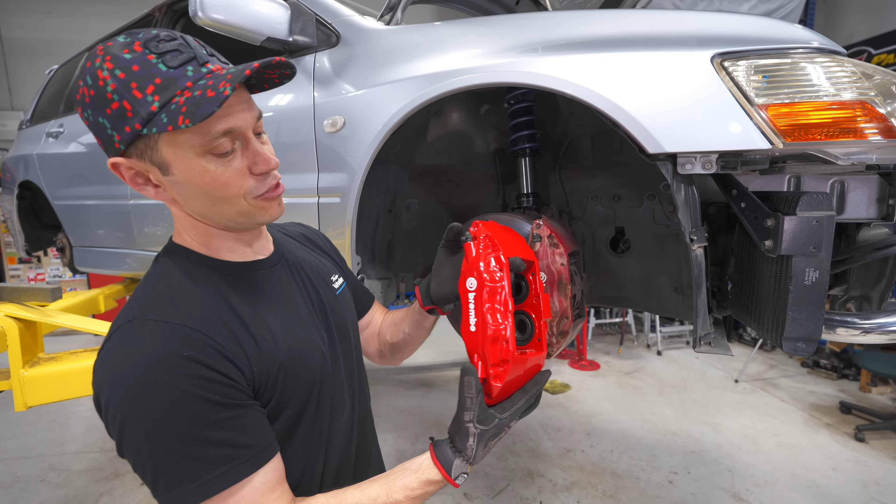This side, however, I did run into a weird thing where the best mod for any EVO is super expensive, and we're just wrecking like some Ralliart collectible. Exactly.

Today is a big day in the life of this EVO 9, everyone. We have big plans, including replacing the suspension, completely refreshing the brakes, and of course doing the all-important wheel and tire reveal. So you're gonna wanna stay tuned to the very end of this episode to see just how amazing this car is gonna look. I don't think you're gonna be disappointed. I'm so excited to see how it all looks in the end.

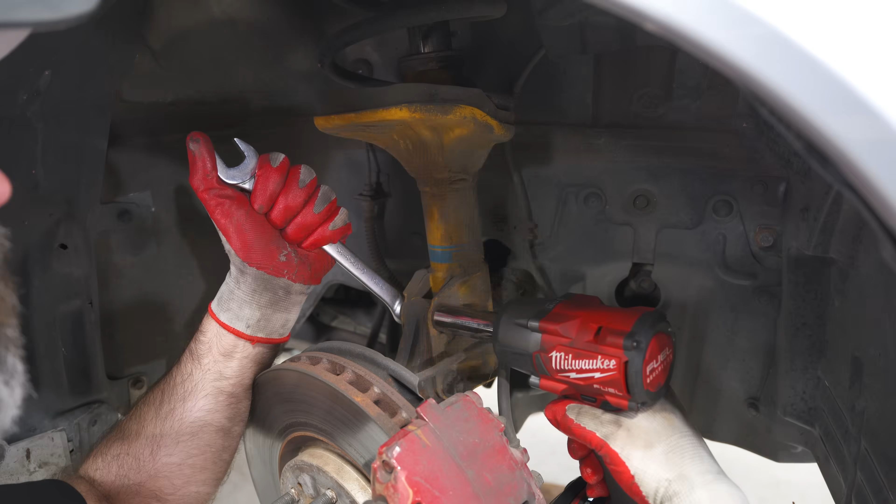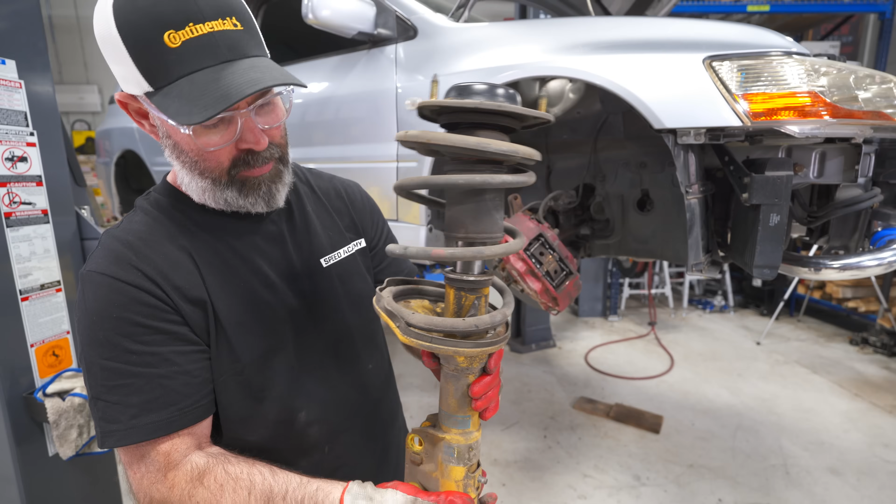And here comes the giant, what I assume is the OE shock and spring combo. The big old Bilstein inverted damper by the look of it. Wow, it's pretty impressive. EVO still always impresses, man. This thing weighs a metric ton though, and obviously does not have ride height adjustability.

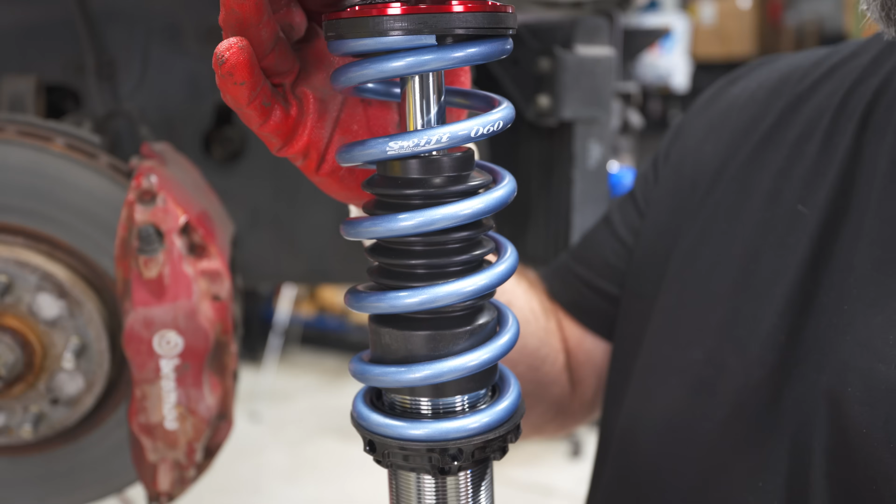And here we go, these are our Annex Flat Ride Pro setup, and they're like half the weight or maybe even lighter than that really bulky OE setup. Interestingly, this is one of the first cars that Annex ever made a coilover kit for.

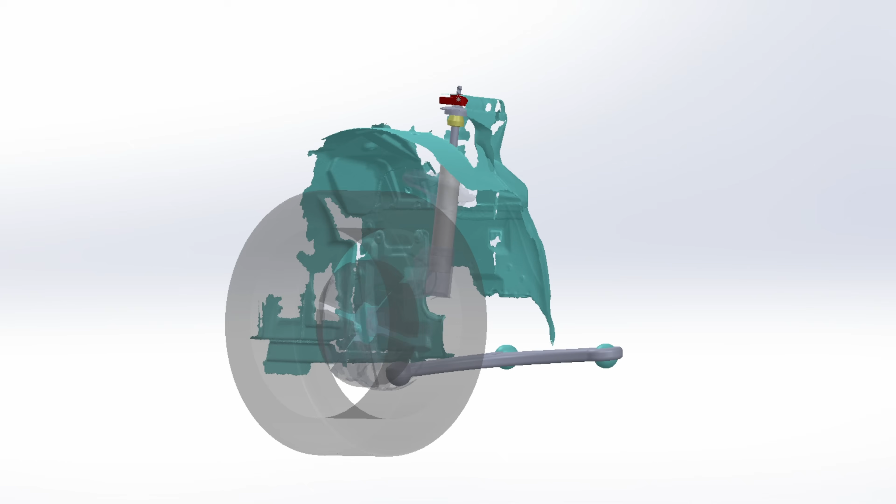However, because they'd never done a wagon before, and Grant was at our shop scanning Connie Salika, he took the opportunity while he was here to scan this car as well. So he did super detailed 3D scanning of all the wheel wells, which allowed him to calculate the motion ratios, which then allow him to choose spring rates and damper curves to go along with those spring rates that suit this chassis perfectly.

And he did find that the wagon is significantly heavier in the back than the sedans, so it does actually use a different spring rate and damper setup in the rear of this wagon versus most other coilover companies, where if you go get a kit for an EVO 8 or 9, you're gonna end up with a sedan setup on your wagon. This is actually a wagon setup, which I think is super rad.

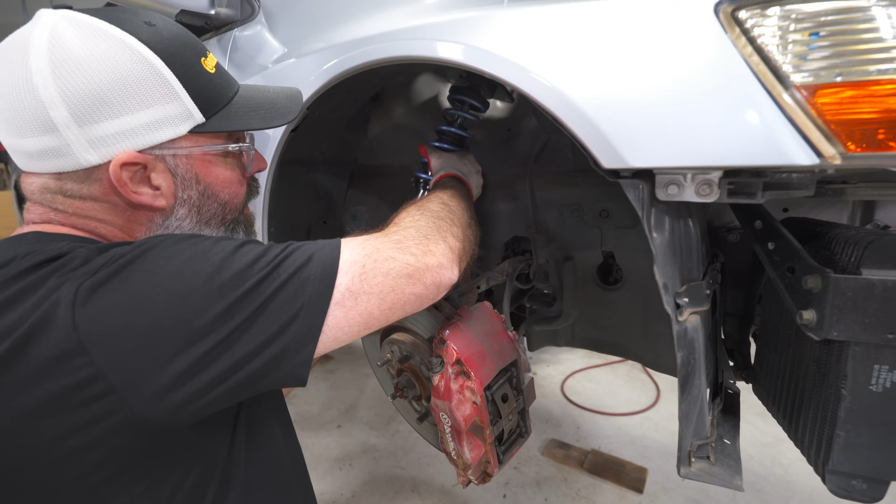One other thing Grant mentioned to me when we were chatting about this kit's development is that he designed it for a flat ride. As the name would imply, it's designed to really limit the sensation of body motion or body roll. So through the corners there's not gonna be excessive body roll, but it's still gonna deliver really good ride quality. It'd be really interesting to try this out once we've got the car fully dialed in and see how that feels.

The previous owner, or the owner before them, did not really care about the interior of this car, because look at this, they cut this massive hole here to either be able to adjust the suspension that was on this car previously, or because they got lazy and didn't want to take this whole panel off to get to the nuts that hold this shock in here. And you can see there were holes cut here for a strut tower bar.

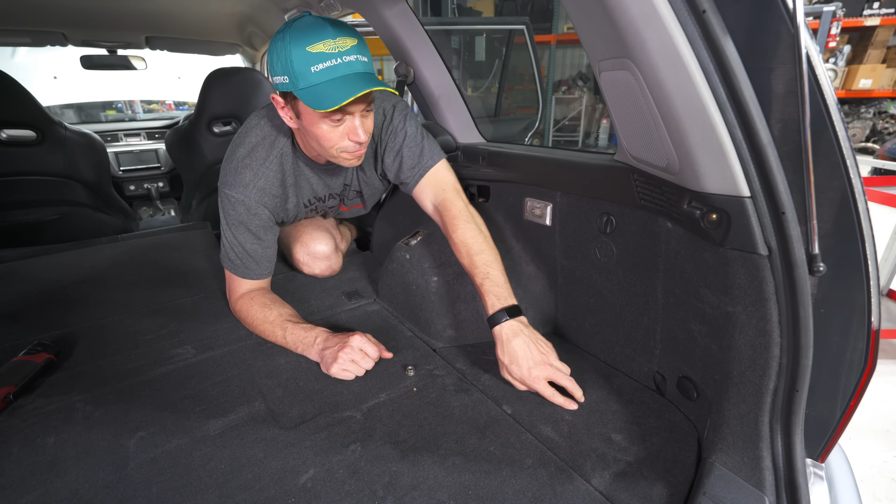It just feels very un-Japanese. By the way, I just noticed this outlet here for 12 volts that you could plug into, maybe to pump up your tires or something, but this certainly is ahead of its time. These days people are putting this in trucks in the back and wagons, and Mitsubishi had it figured out all along back in 2005.

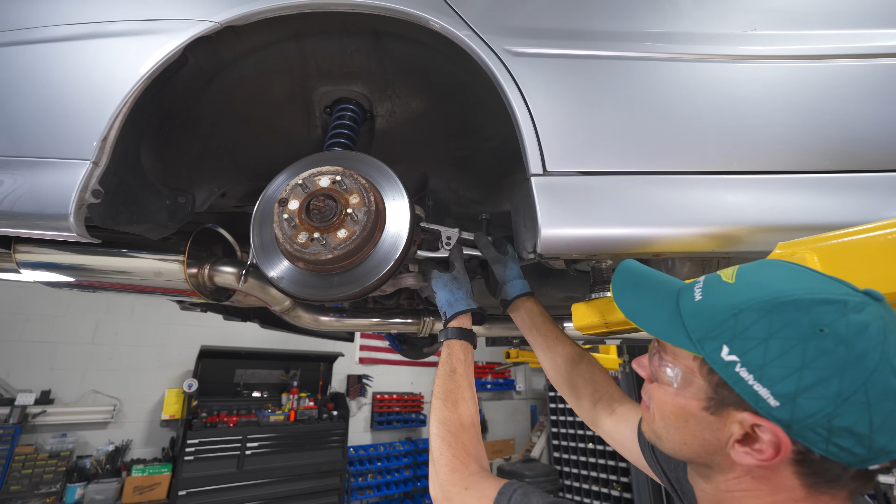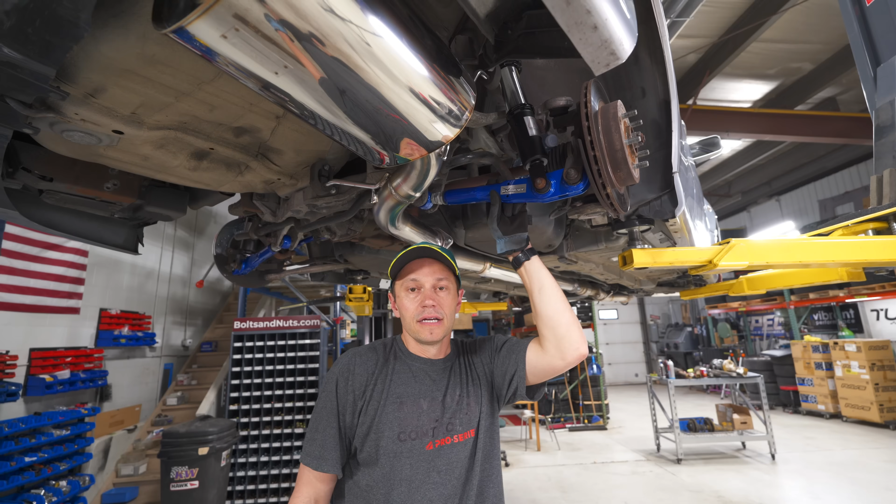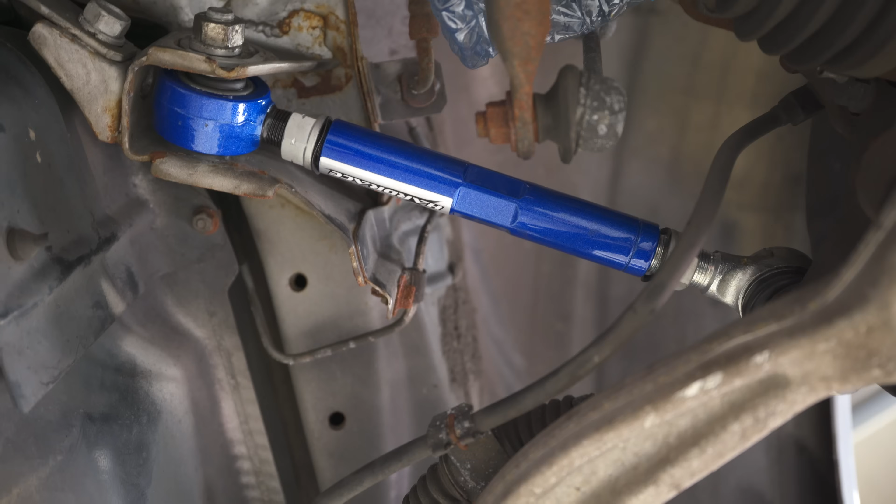And that, in a nutshell, is the extent of the suspension mods. As you can see, we put the Hardrace adjustable lower control arms on here. These are gonna allow us to adjust camber in and out, and we've got the toe arms as well, which will allow us to adjust toe. Toe was adjustable on this car, however, I like having those arms.

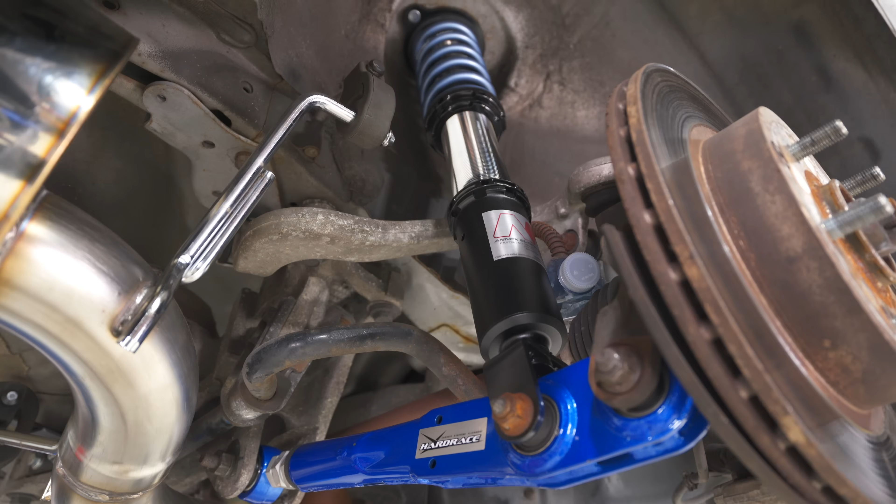You can see we are missing a caliper here and the brakes are quite worn. We're gonna be doing something about that in one moment, but before we do, I need to clean this area up here, and you will understand why when we put our wheels on. Let's just say they don't have center caps and we want this to look proper. So I got a wire brush on the drill here, and I'm gonna do my best to clean this up as good as possible, just to get the surface rust off.

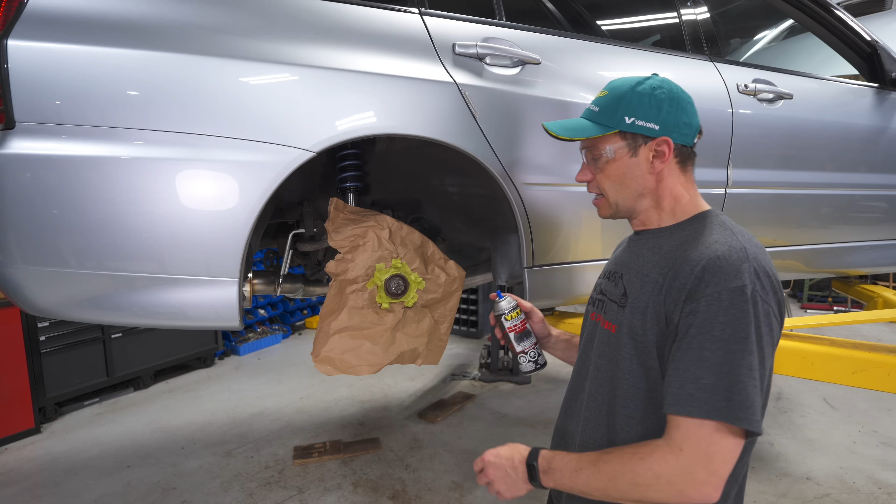So you can see this is nicely cleaned and prepped, and we are going to be using some VHT roll bar and chassis paint, because that's kind of what I have, and I think it's gonna be the most durable. Just gonna give this a quick blast here, and we're gonna do the same for the front as well.

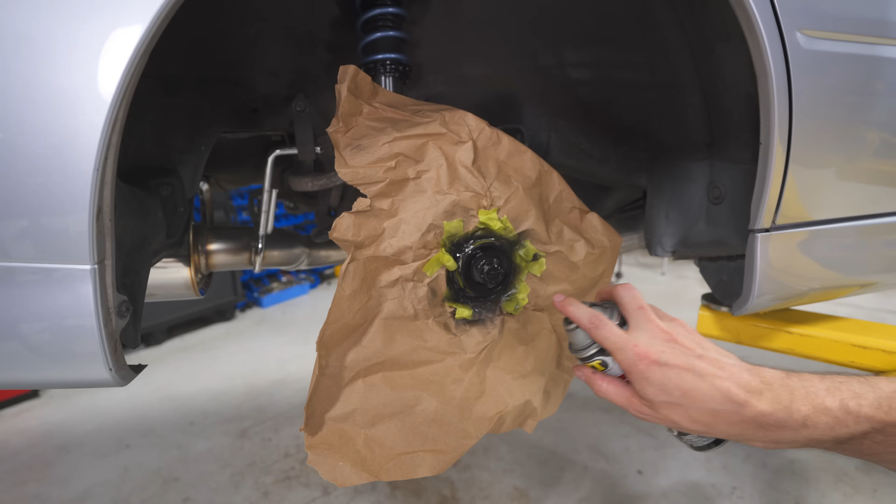A little bit of black paint here is going to go a long way when you see the wheels. What you saw is I just ended up rolling the rear fender here, because the wheel fitment is just a tiny bit tight. These EVOs can have nice concave wheels, but the rears do need a bit of a roll, and the driver's side went perfect. It's just so good.

This side, however, I did run into a weird thing where I don't know if there was a little bit of stuff that was fixed back here, because it wasn't rolling very well in the middle. Now you can see there's a pinch weld that was here, and it almost collapsed a little bit of the sheet metal here. It's not bad, but it's just enough that you can see it, so I think we're gonna have to call a PDR guy in to just give this a little pull and bring it back a little bit. I think that's going to be the case.

We are moving on to doing a brake upgrade, and even though these Brembos are amazing, the Mitsubishi and Subaru 4-pot Brembos are perfect. They're very adequate for 90% of the people using these cars, even for track use. However, as you can see, they do fade out, and they have clear coat that just fails. You can see it's falling off, and then you just have a caliper that looks kind of disgusting.

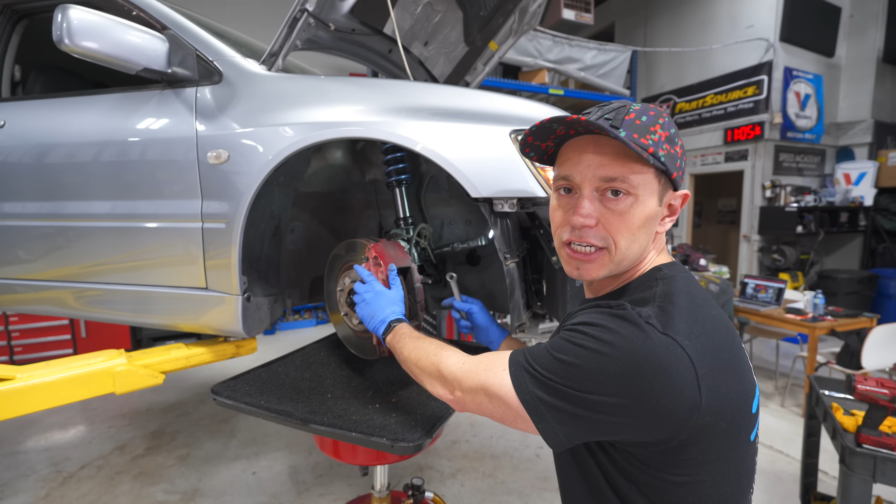Here's a bit of a pro tip. I'm ready to pull the caliper off. The brake line is hooked up into here, and usually as soon as you break this loose, you're gonna have this line start dripping and leaking and drain all the fluid out of the brake master. However, you're gonna see here, I'm gonna get a small surge of fluid that comes out right now, both from the caliper and the line, and then it's just gonna stop.

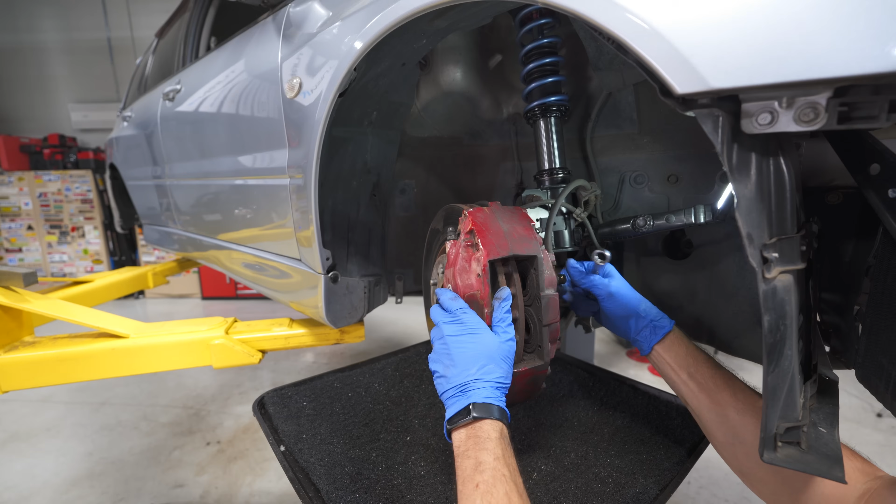That's because what we've done is we've depressed the brake pedal, and we're using a brake stopper. So the brake is all the way down, and in doing so, it kind of pushes the seal past the master, so there's only a certain amount of fluid that'll run out of it. You can see, look, this isn't dripping. This will stop dripping here, and that's it, you're not gonna get any leaking. So now you can take your time doing this caliper swap rather than rushing to get the other one on while the fluid constantly drips.

So it's actually a pretty good tip. You do need, you know, you can use a piece of wood or whatever to push your brake pedal down. We kind of have this nice tool for it.

We are also saying goodbye to the factory rotors. You can see these boys are well worn, got a nasty little lip on the side there and there. Replacing that stock rotor, we have a PowerStop Z23 Sport Upgrade brake kit, which consists of this zinc-coated rotor, got some cross-drilled slots in it for that performance look. The kit comes with the sport pads that are carbon fiber, everybody.

Now I'm gonna have carbon fiber in my brake pads. They are a carbon fiber ceramic, but they're obviously gonna provide us with better stopping power, and they're also good for low dust, which is nice. The kit also comes with brand new hardware, as you can see right there. So I'm gonna punch those back in, but now look at, oh, how refreshed and good does that look?

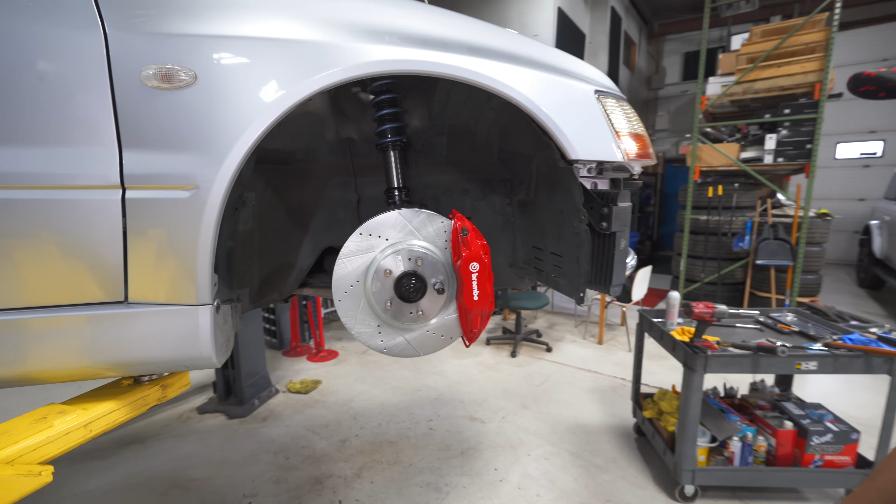It's a mighty fine brake upgrade, and I know some of you are gonna ask why I didn't paint around this area where the rust is. Well, when I originally masked it, the rotor was on and I couldn't get there. But don't worry, when the wheel is on, everybody, that rust does get covered up. So it's safe, it's just cosmetic right now.

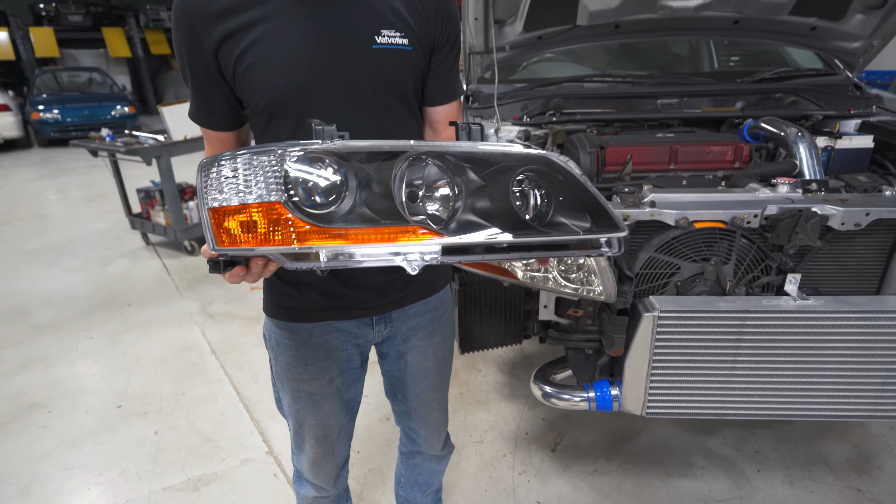Instead of splurging on a bunch of exterior mods like front lips, side skirts, that kind of stuff, I decided to put my money into what I think is the best mod for any Evo. The 9s already look so good. I don't think they need much other than, bam, everybody, a set of Evo 9 MR headlights. These are the JDM ones, so they're a matte finish in here, and I think they are going to finish the look of this car so nicely.

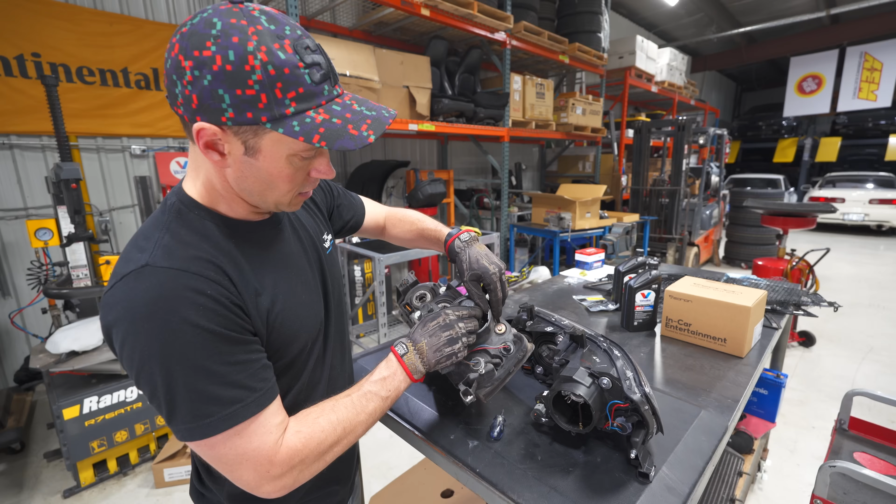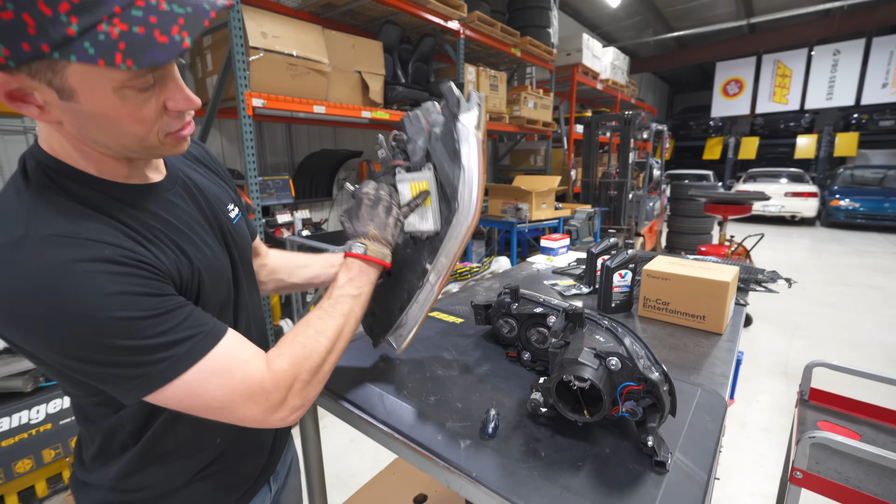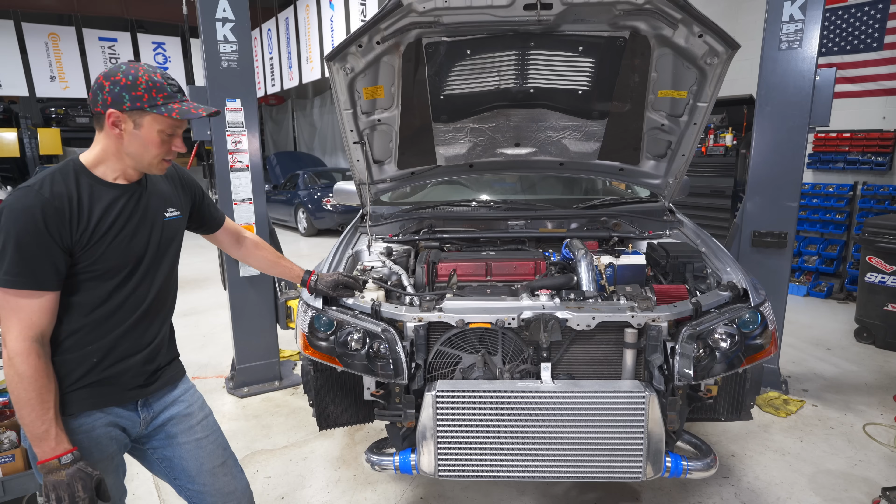For those of you making this upgrade, you will need to move over your HID ballast and the actual igniter, which is down here. So that may pose a problem for some of you that don't have HIDs. I think some of the Evo 8s came with regular halogen ones, but as you can see, this one is set up. So in this scenario, because this is a JDM car, this is literally a plug and play solution. These truly are the holy grail of Evo upgrades. Man, do they look good.

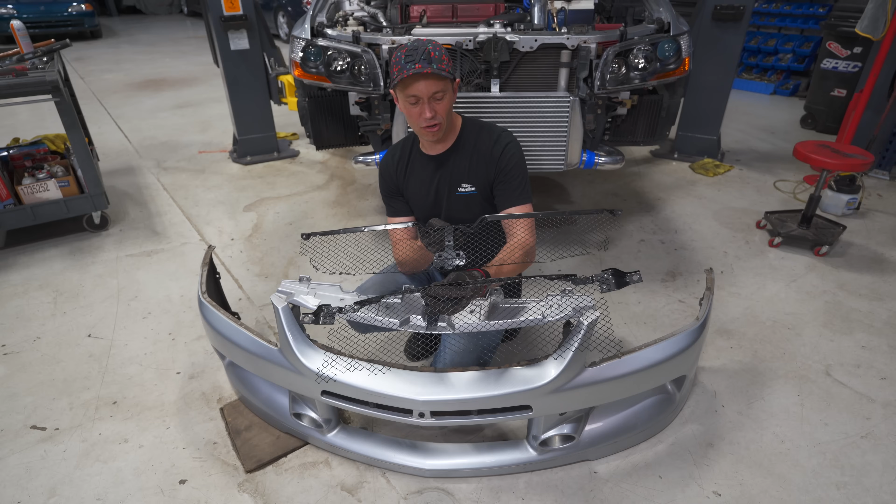Now for the bumper, I'm not gonna be doing anything other than what I did, which is I took all of these grill pieces, these mesh parts, to our buddy JP over at Stripping Tech, and I had him powder coat them, because if you guys watched the previous episodes, you'll know these were in really bad shape. They kind of had some minor rusting going on. They just didn't look good, and this is a great way to refresh them. If you buy these, you can buy them new still, but they are mega expensive, so this certainly is the way to go.

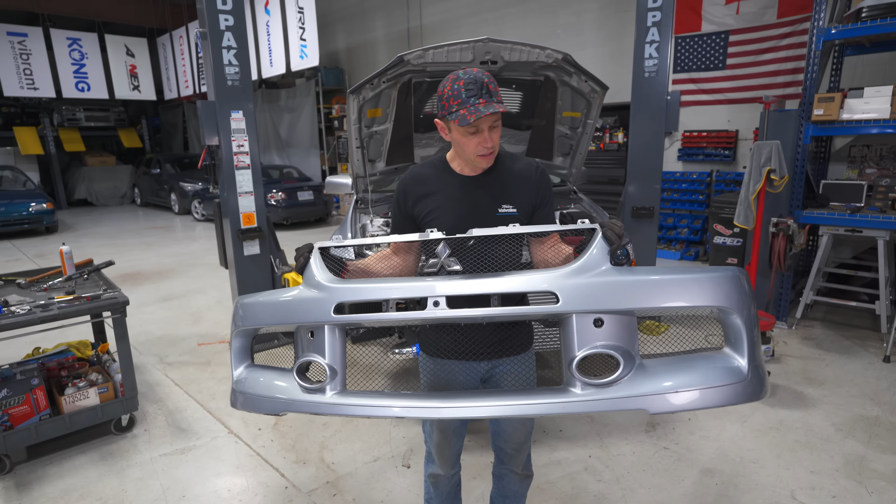You can see they look mint. Gonna really refresh this bumper back to what is, I think, almost like new. Look at that. All of the mesh refreshed, looking brand spanking new. They even polished that little Mitsu logo.

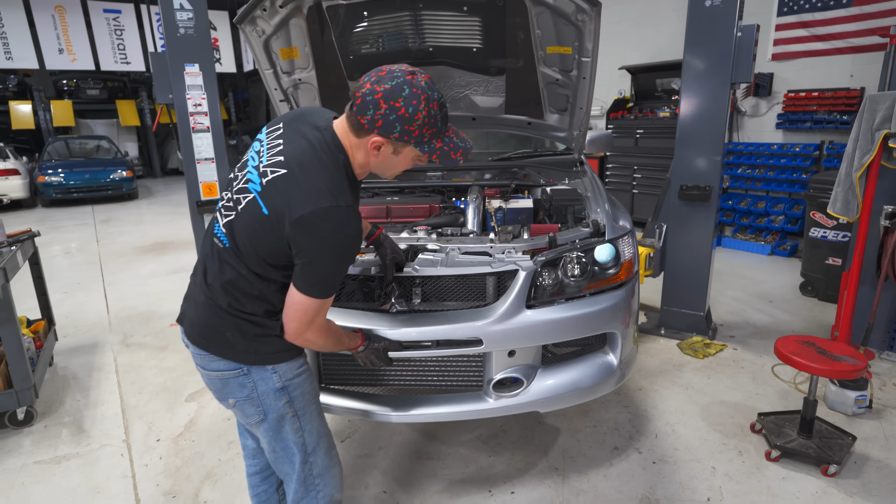I was thinking about painting it black. I was, but you know what, I was like, there's a little bit of chrome in the headlights still. So we're gonna leave it, and not to mention charge pipes. Yes, you are correct. We are. Man, DP, that is looking excellent.

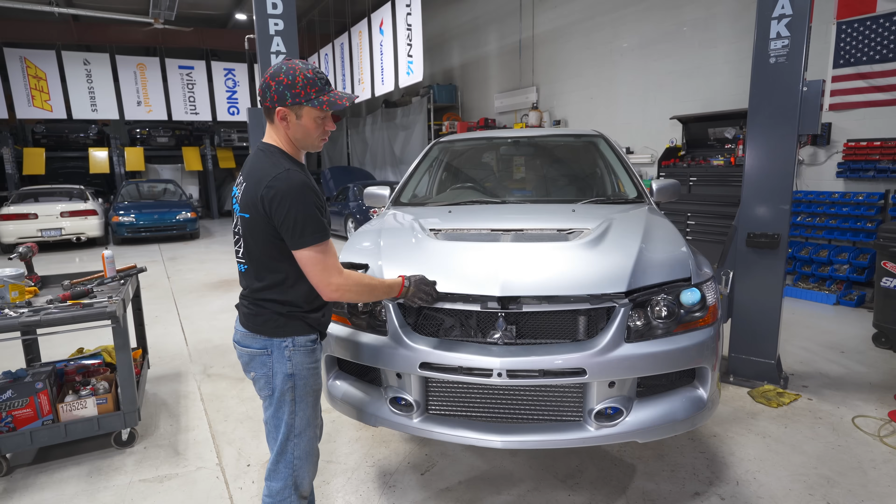Let's just close the hood here for one split second and admire those JDM MR headlights. Man, aren't they perfection? A wise man by the name of Ben Lin once said, Advans are always the answer for Mitsubishi Evos.

And I have listened to his advice, and he's 100% right, everybody. Advans are the answer. These are a set of Advan Racing RG4 18x9 plus 25, perfect Evo fitment in my opinion, with a whole lot of concave and this satin black finish that is going to look amazing. Just gonna match the theme of the car, I think, so well.

What I really like about these wheels is they are flow formed, so they're not crazy expensive like the forged stuff. And they do have kind of like all of the racy little details, like these little cutouts here, these machine cutouts. And for a set of tires, well, you guessed it, we have gone with a set of Continental Extreme Contact Sport 02s, our go-to summer performance tires, great in the rain, awesome in dry conditions, and pretty good on the racetrack too. We love them.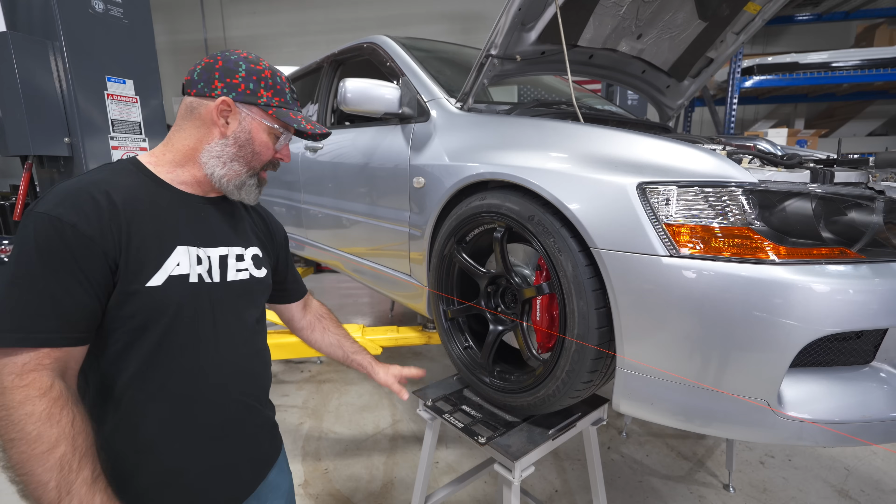As you can see, we've got the Evo on the ground now, and by ground I mean our BG Racing wheel stands. They're all nice and level, which allowed us to dial in the ride height. Spent quite a bit of time doing that, but as you can see, it looks perfect now. And man, these wheels on this car look so good. I mean, is there anything cleaner than an Advan wheel on a JDM car? I don't think there is. It just looks amazing.

So now that we've got the ride height dialed in, and we've bragged about how good the wheel and tire setup is, it's time to do an alignment. And for those of you who are curious about it, the first step is to set up your stands and get them all level.

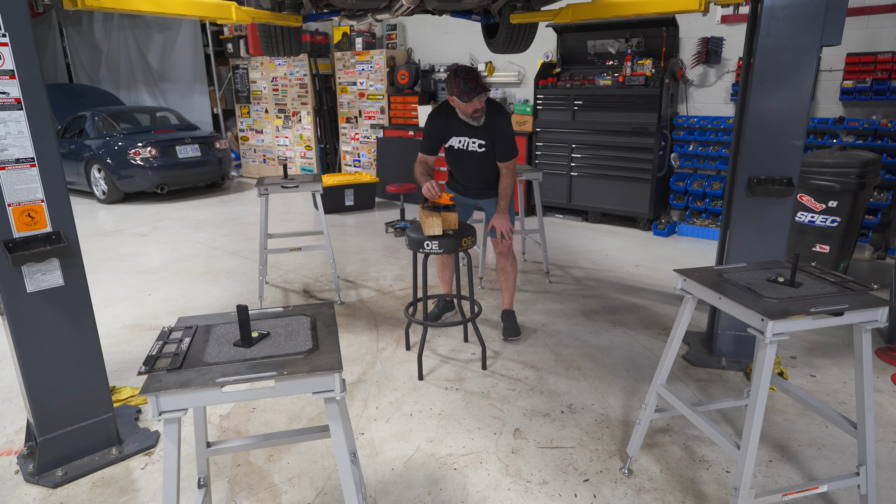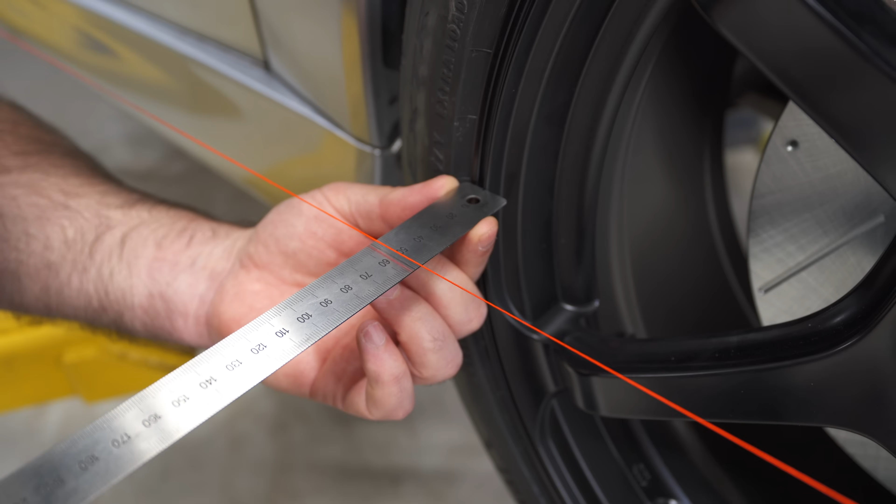We use a laser device to set them all to level. Once you've got a perfectly level platform, you can dial in a very accurate alignment with this string system. By measuring out from the hub on each wheel, you get the string the same distance on all four corners so that it's perfectly square. Then you can start taking your toe measurements at the front and back of the wheel, and of course use your camber gauge to take camber measurements.

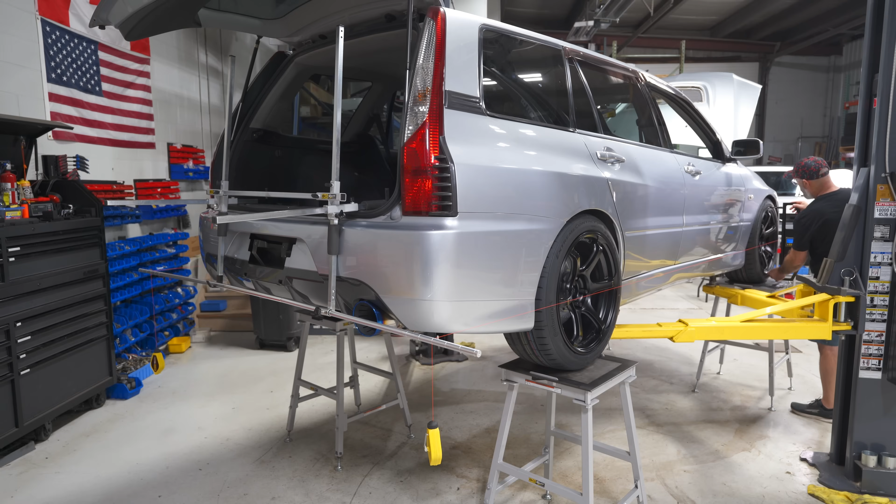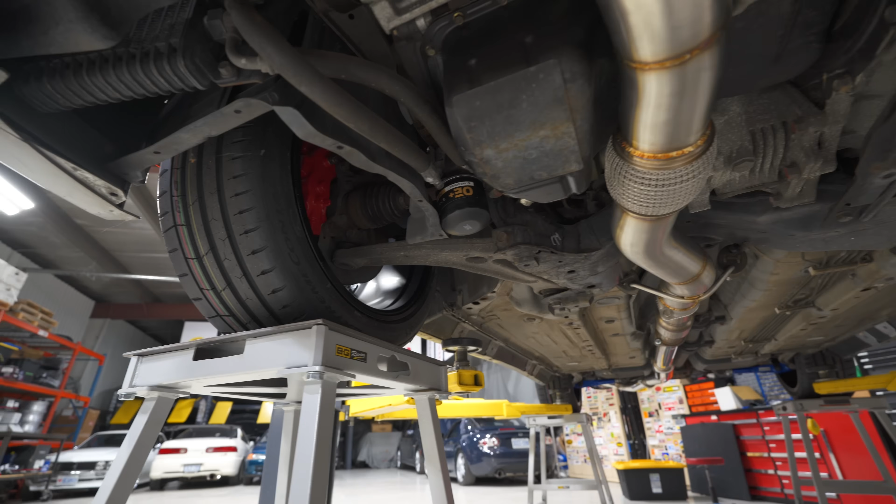For you DIY guys, you can set up a string box at home really easily, just with jack stands on the ground and a string. Get a piece of conduit with string that runs down the side of the car. I used to do my alignments at home with that exact method, using linoleum tiles on the ground to create a flat platform. So it can be done very affordably and easily. There's some great information on the internet about it, and there's even a course about how to do this on HP Academy's website, so check that out if you're interested.

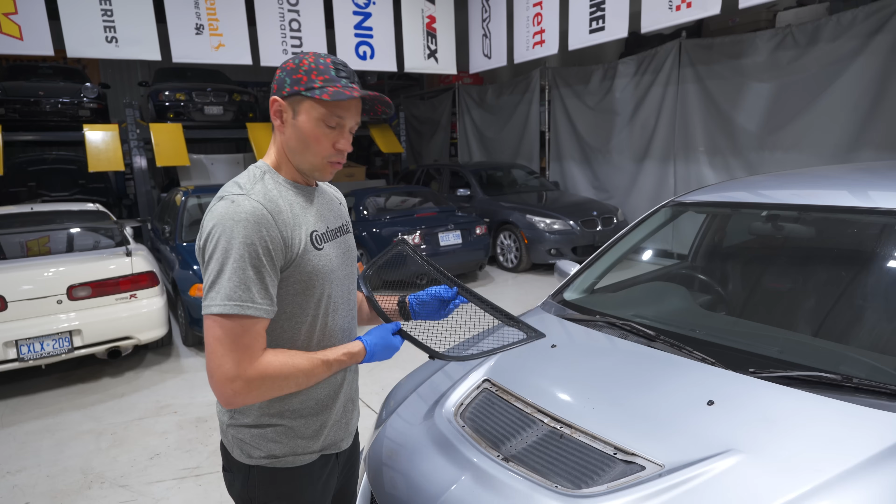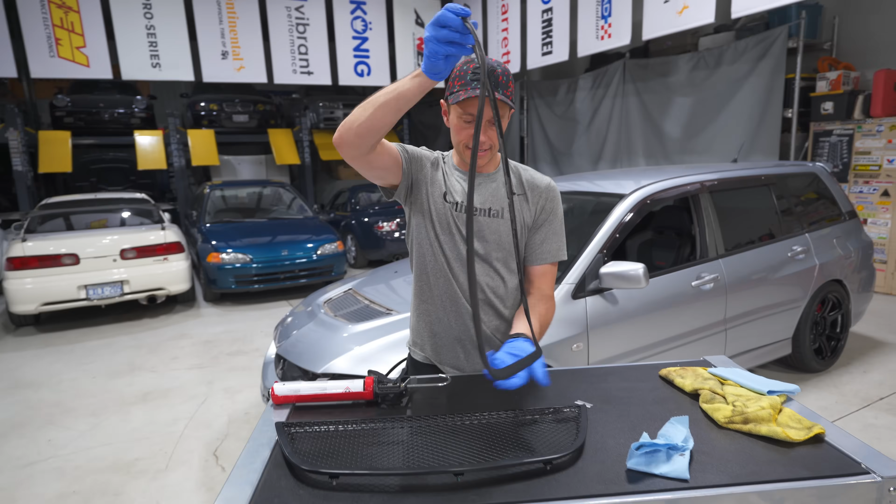One of the other sore spots on the front end here was this vent that comes through the hood. You can see it is now refinished, just like the other pieces from Stripping Tech, and it looks really good. However, what I had to do was peel the rubber trim that goes around the edge to send it off to powder coat.

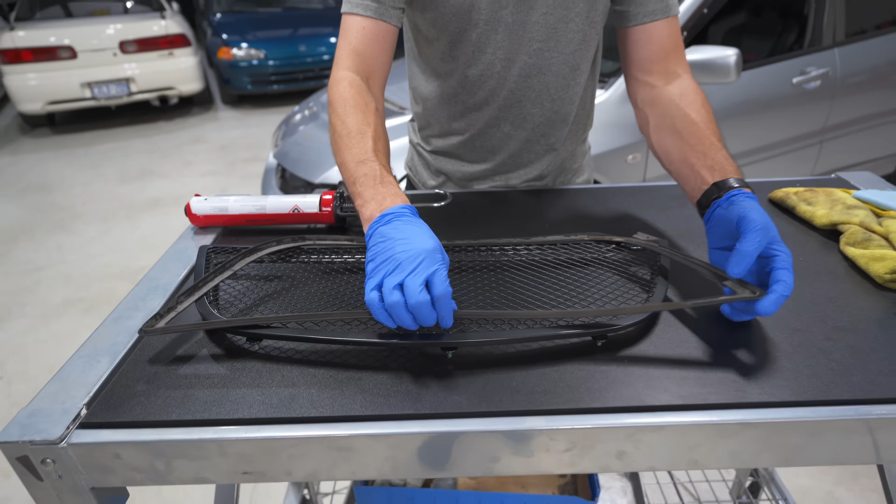I noticed this was on double-sided tape, and for DP and I to sit here and try to take all this double-sided tape off and then put new double-sided tape down just doesn't seem like a worthy cause of manpower, time, and effort.

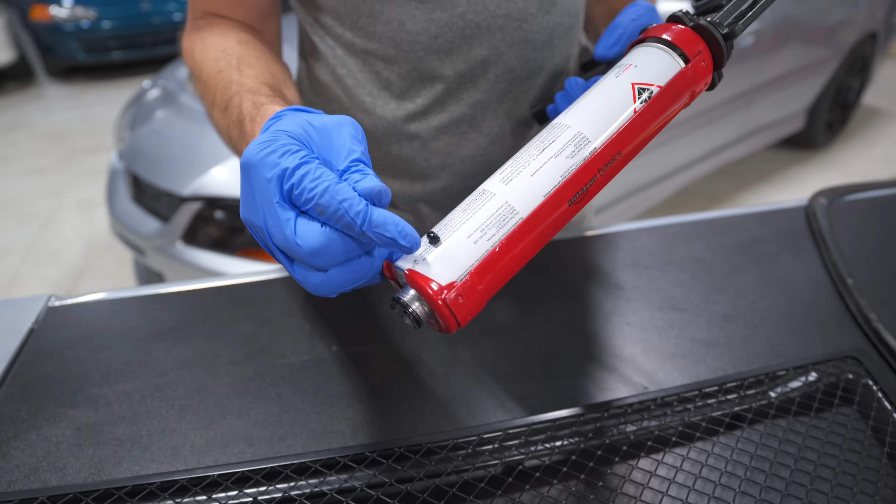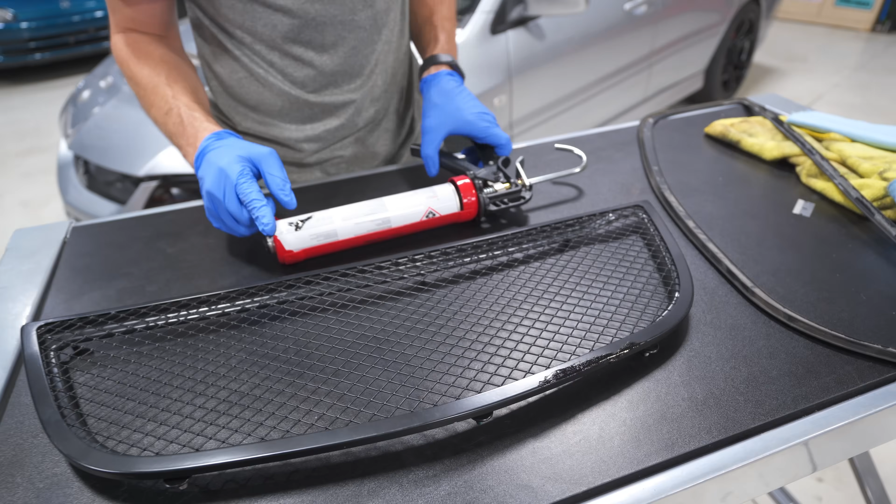So I've got some urethane here. Of course this is dried up, like it always does. I don't know if it's just from keeping it too long, but it dries up and then you poke a little hole. What I'm gonna do is take a little bit of this - oh man, this is thick stuff - and lay it around the edge here, and then we're gonna stick that down. This urethane, I'm pretty confident, is going to hold this in place.

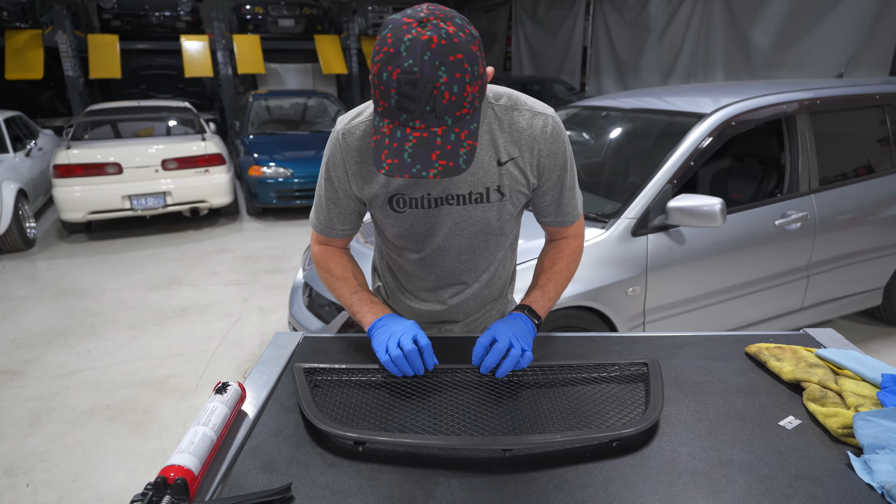Urethane is on here, everybody, so there's no time to waste. Let's lay this on, push it down into place. Get the corner to go on, stretch it a little bit. Oh, there's a little bit on here, DP - well, we can wipe it off. There you go, that's gonna look as good as new.

Before we go showing you what this thing looks like as a whole - and man, it is looking good - we're gonna just take care of a couple other small things, the first being these little door deflectors or bumpers.

These look like they've been on here for a very long time. I'm gonna give it a little bit of heat - the more heat we have, the better in this scenario I find, because the glue softens and you should be able to really slide this off. Finish it off with this guy. Okay, looks like we're gonna have to bust out the polisher here real quick.

You can see this has certainly been on here for a long time. The glue's gonna come off pretty easily, but this - wow, yeah, that is a real mark. Now to get this off I've got a little bit of our Simoniz polishing compound here and a wool pad.

We could actually bust out the polisher, but I feel like I'm gonna be able to do this by hand, everybody. Let's see - oh my goodness, look at this, it disappears within seconds. There you go, look at that. Just like new, DP. Holy smokes, if cleaning your paint was only that easy.

Next up here are the wind deflectors. I personally - I don't know - I like them, but I don't because they're faded, and them being faded really doesn't make them look great. I do need to remove them anyways because we're gonna want to take off a bunch of this chrome trim here I want to get rid of.

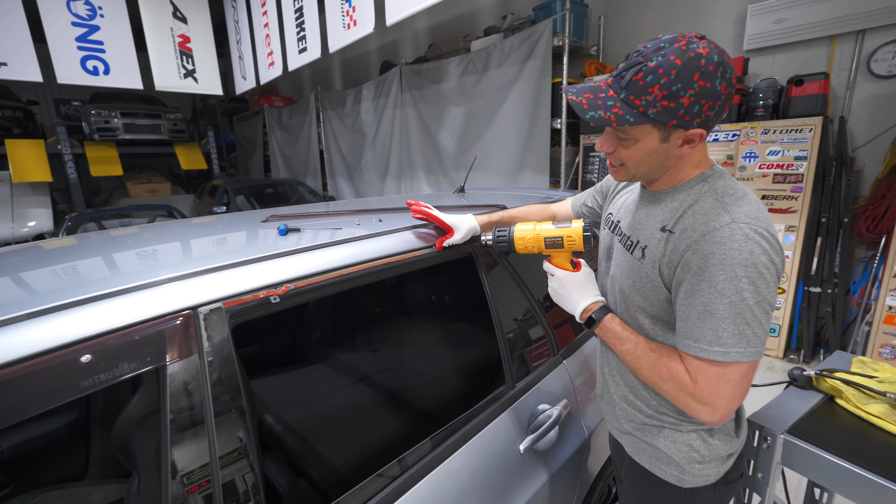Look at this, it's so weird. This is the original red tape that comes off. Someone had put this on to add a little bit of thickness, maybe because of this chrome trim, but you can see this stuff is so old. A little bit of heat again, and this tape is coming off quite nicely. You can see underneath here, this is gonna be clean. So thankfully this isn't going to be a terrible job.

I know it's a minute detail, but some of you are wondering how you get these little clips off, since they're tight in there. What I've realized is it's underneath the trim, so you've got to pull this whole trim out a little, push down in there, and bend it at this point. Then it should pop out. Oh, there it goes, you can see that. So this piece just goes in there, it's in there tight, but you just pop it back together. And then we need to give this a good clean up.

So are you saying, PT, you don't want a mirror chrome on your doors? Who doesn't want to be able to see themselves as they walk up to the car and say, look how cool I am getting in my JDM car, bro? Somebody clearly did, because they put this on here.

Imagine if these were super expensive and we're just wrecking some collectible Ralliart item someone put on here. I'm sure someone's having a nervous breakdown right now.

So I don't see any labels on this. Well, look at that, I love this look, I think it's like 100 times better. I know the JDM purists love their wind deflectors, but for me this is the way to go. Certainly post in the comments, are you a deflector kind of guy, or are you a clean kind of guy?

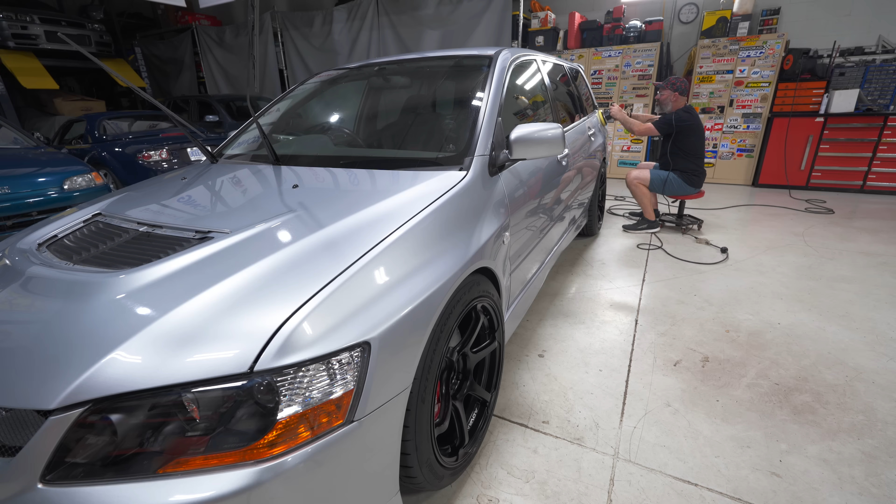Wow, this car looks so much better with a quick polish, and the paint was already in good condition. I made a quick pass, as you saw, with Simoniz Platinum products, including their dual action polisher, and it worked extremely well. Very pleased with the way this paint cleaned up. So I think it's now time to fully reveal this car.

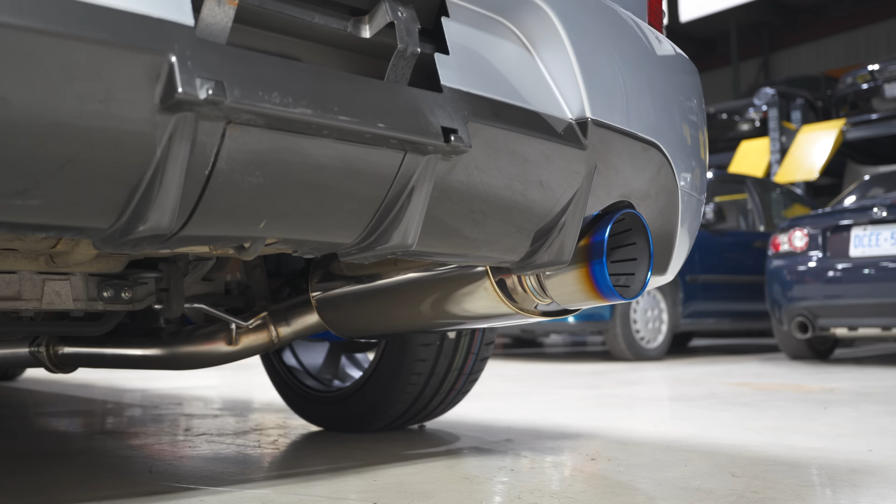This is it, everybody, EVO 9 Wagon perfection for me. This thing turned out so good, I didn't expect it to look this good. I really do love the proportions of this car stock, so we could have added a front lip. I know some of you are gonna be mad we didn't put an SC front lip or some aggressive front lip on it, but truthfully I just love the way it looks. It's kind of that OEM plus.

With the black wheels, the stance is perfect. The fitment on these wheels, 18 by 9 plus 25 with a 245/40 18 tire, just looks perfect. The craziness for me is the brightness of the rotors right now, these wheels are popping like crazy because of those rotors. They'll wear in a bit, but I'm glad I went with the red calipers, it's just that one little nice accent on what is like a black and gray themed car.